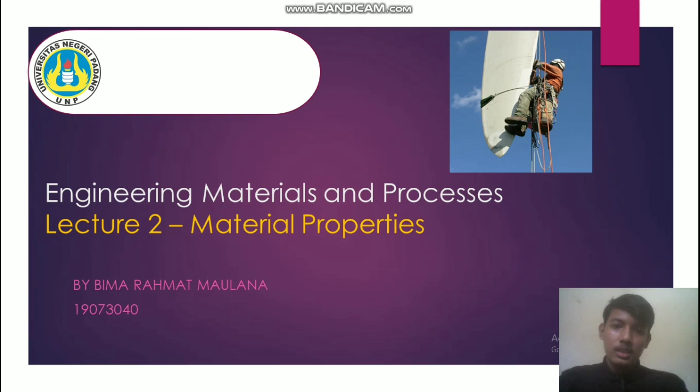Next, engineering material and process. Number one, properties.

Properties are characteristics of a material. They should be about the same for any piece of the material. Some properties can be measured easily, others may require breaking a specimen.

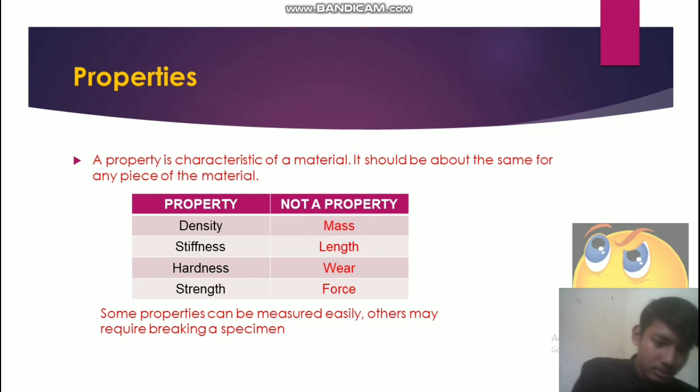Next, example properties: hardness, density, toughness, elasticity, ductility, conductivity, resistivity, linear expansion, softness, corrosion resistance.

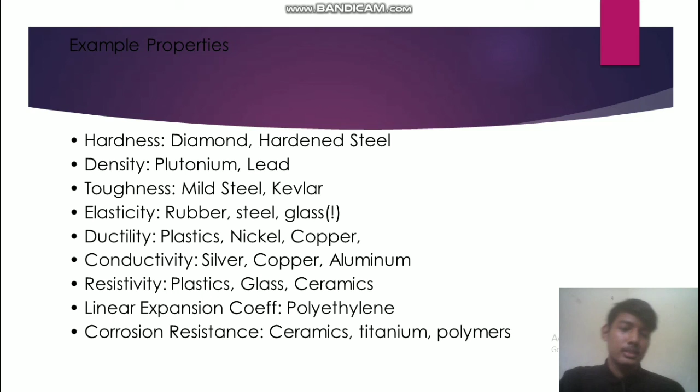Next, class of properties. Number one, mechanical properties. Most are related to force applied to the material: strength, stiffness, hardness, and toughness.

Number two, electrical properties: resistivity, conductivity. Number three, magnetic properties. Number four, thermal properties, optical properties, aesthetic properties, chemical properties: reactivity, corrosion resistance, chemical compatibility, degradation.

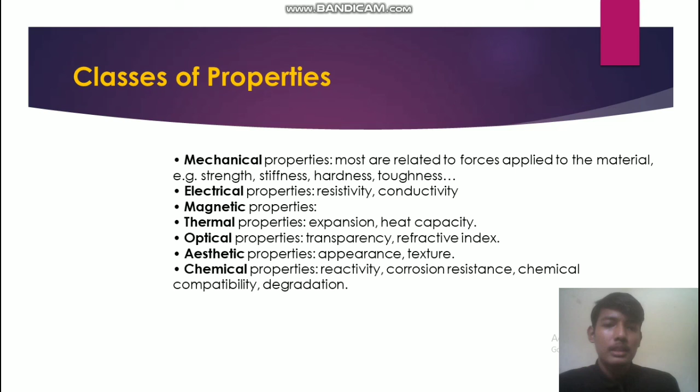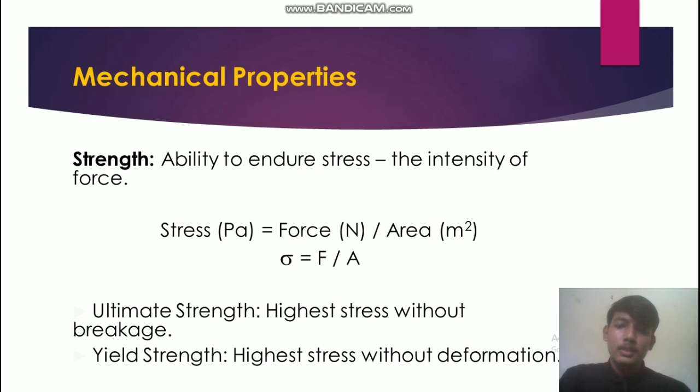Next, strength. Strength is the ability to endure stress, the intensity of force. Ultimate strength: high stress without breakage. Yield strength: high stress without deformation.

Next, mechanical properties definition. Ductility is the ability of a material to deform plastically before fracture. Percent elongation: plastic deformation determined after fracture by realignment and fitting together the broken specimen.

Engineering strain is the change in length over the original length. Strength is the ability to endure stress, the intensity of force.

Next, ultimate tensile strength, the maximum tensile stress that a material is capable of sustaining over the original area. Stiffness: stress required to give a certain strain. Toughness: energy to break. Hardness: resistance to indentation or abrasion.

Next, problems faced in choosing material. Among others, the first is finding the most appropriate material to use. The classic example is a conflict between strength and tenacity. Normally, material which has high strength has only limited ductility.

The second consideration is any damage to material properties that can occur during service operation. For example, significant reduction in mechanical strength can occur as a result of exposure to high temperature or a corrosive environment.

Cost of production: a material can be found with the desired properties, but it may be very expensive.

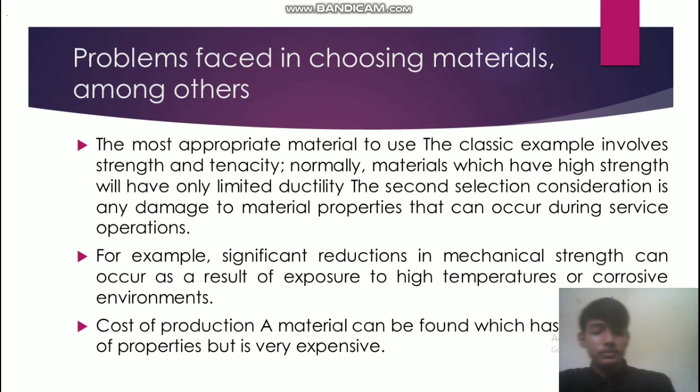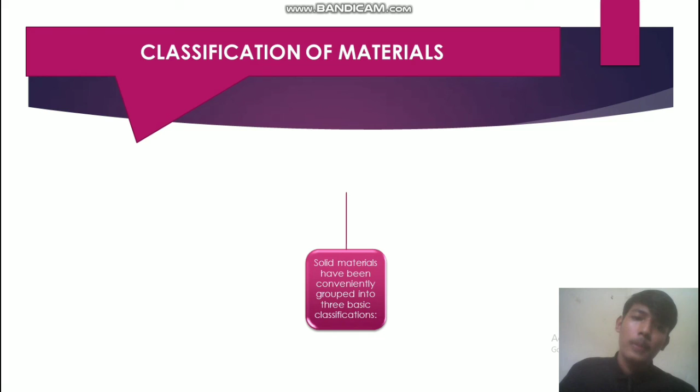Next, classification of material. Solid materials have been conveniently grouped into three basic classifications: number one, metal; number two, ceramic; number three, polymer.

Next, metal, or logam. Materials in this group are composed of one or more metallic elements, such as iron, aluminium, copper, titanium, gold, and nickel.

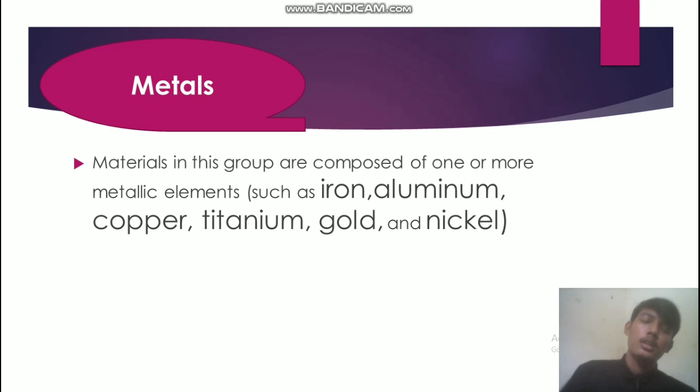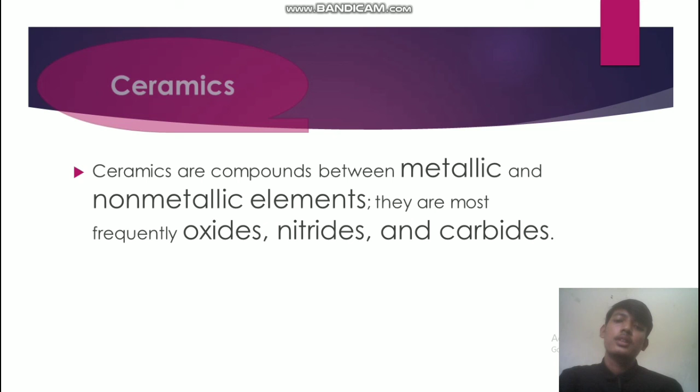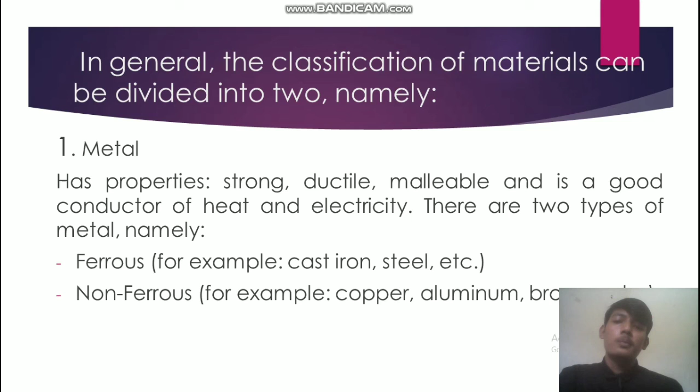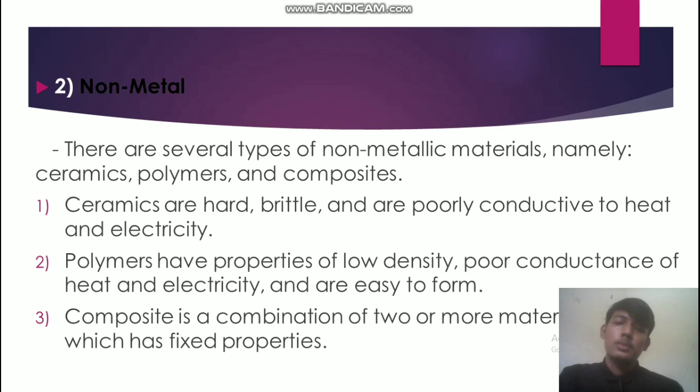Number three, composite is a combination of materials which has fixed properties. Engineering material.

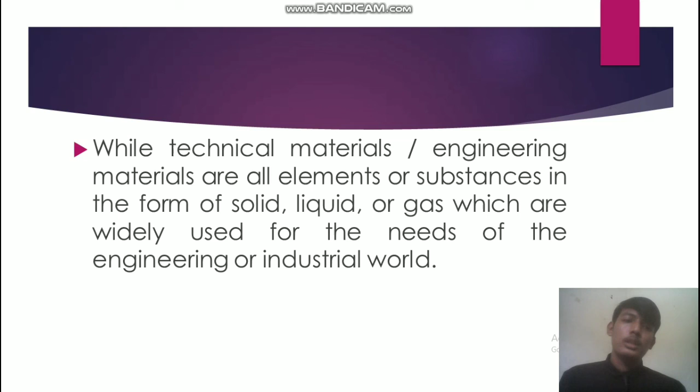Technical material, or engineering material, refers to all elements or substances in the form of solid, liquid, or gas which are widely used for the needs of engineering or industrial world.

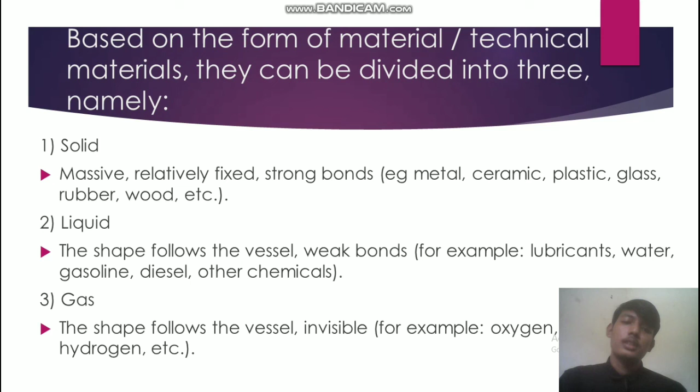Gas: the shape follows the vessel, invisible, for example oxygen, hydrogen.

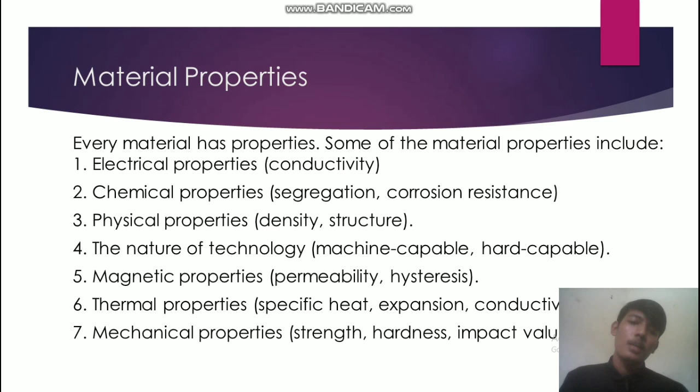Next, material properties. Every material has properties. Some include electrical properties, chemical properties, physical properties, the nature of technology, magnetic properties, thermal properties, and mechanical properties. For the selection of material to be used, several things must be considered, namely function, constraint, objective, and variable.